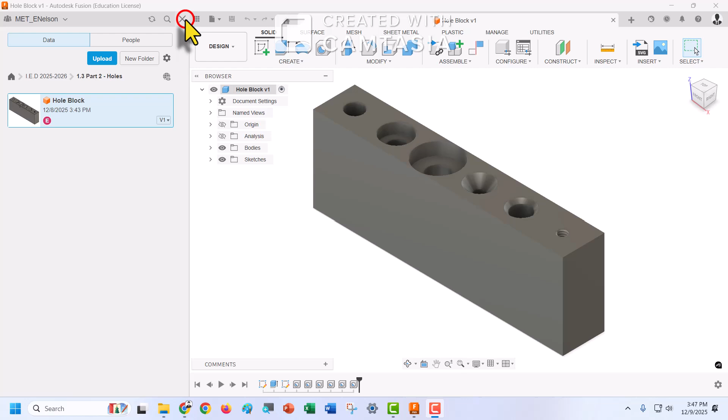And this is where it's most important because we're going to need to use the proper notation. Make sure you have the hole block open and you're in 1.3 part 2 holes. If not, make sure you have that folder and close this up. Begin like usual. Make a drawing from a design, and instead of from scratch, it should be from your title block, and press OK.

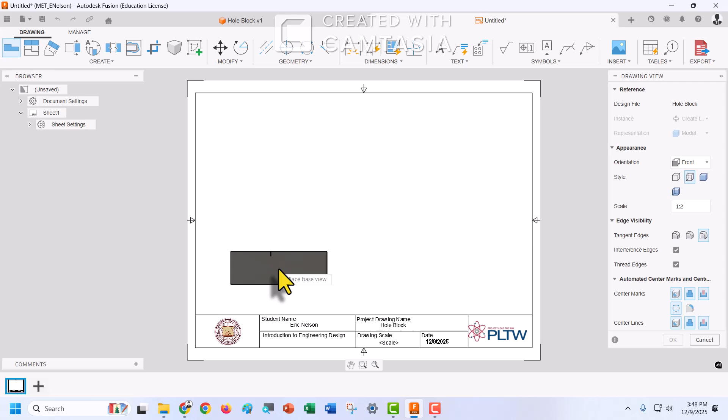Now, I think 1 to 4 is not going to be a good enough size, so I'm going to switch this to 1 to 2. And I'm going to place this, I want you to place it a little lower than you might normally do. And then we could hit OK.

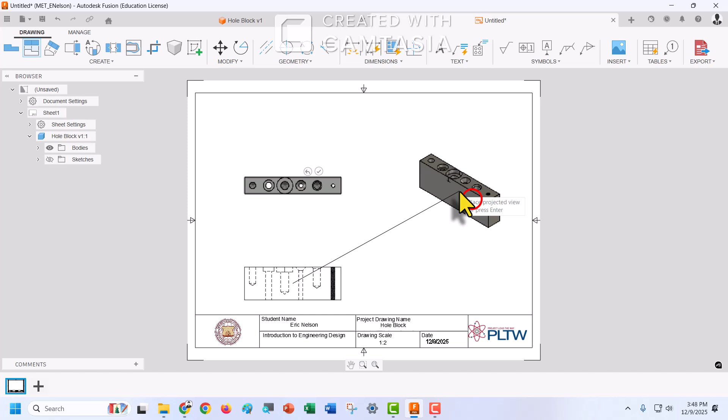And now we're going to hit project, and we're going to project to about this height, not too high, because we're actually going to put a lot of information above this. And go to the right and check it off. So the next step is we need to turn this into a shaded.

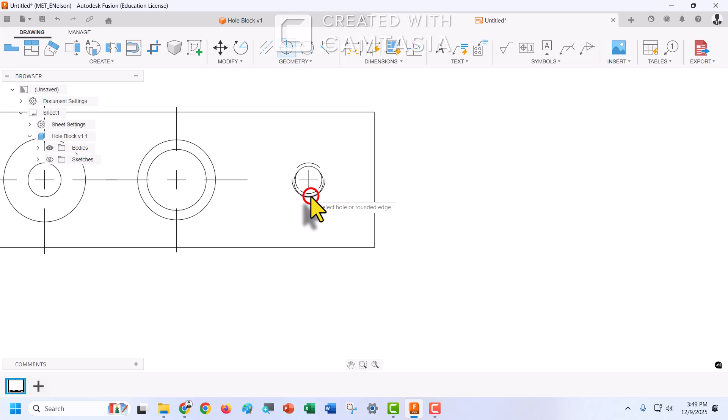Close. Now you may or may not have all of these icons, so make sure you get all of those. Also, these should all have center lines.

And that's it. Alright, so first thing I'm going to do is put the dimensions of the height. That would be this side right here, 2 inches. I'm going to kind of extend this a decent amount. That's 1 inch. And the point from any of these down, that's a 1/2 inch.

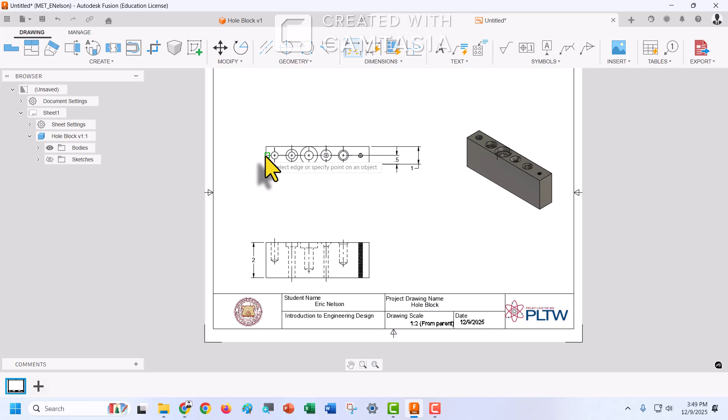Now what I'm going to do is just start from the left edge and go to the center of each point, and I'm just going to keep doing this all the way over. All the way over. Click. Left edge, center, left edge, center. We can see that these are each an inch farther than the last.

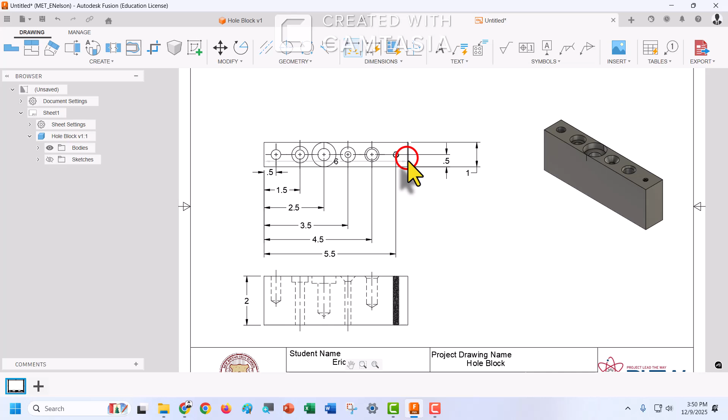And I don't have to do the last math because I know that this is, oh, I do have to, because I didn't say that it's 6 inches. And there we go. So that's the easy part. That's what we've talked about before. The more challenging part is going to be getting all the correct notation, right? We can get the diameter if it's just a regular circle, but these are very special holes. So Fusion makes it nice and easy for us.

Hit the drop down for text, hit hole and thread note. We're going to click on the edge, and because I'm going to bring this to the left, we're going to click on the left edge, and I'm going to just arbitrarily put it down because I'm probably going to have to fix this later. Then I'm going to do the same thing here. And the same thing here. Now I'm going to go the other way.

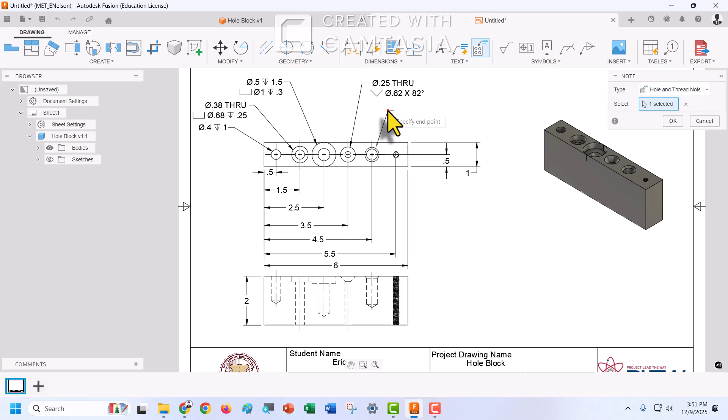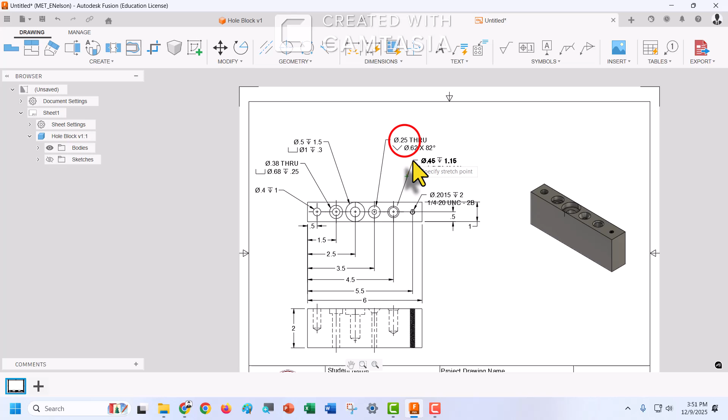Okay, now right click and press OK or press cancel. Now what you're going to notice is it's a little bit sloppy. So click on this once, we can kind of space these out a little bit. Again, if you click on it once, you get this gray dot. Make sure you don't cross any of the leader lines. Make sure there's enough space that everyone could follow.

Now, I'm actually going to make a change right here. So quarter is a 1/4 inch diameter. 20 is your threads. 2B is important, but this part, 0.2015 down 2 inches, that's not important, right? Because we know it's going to be a through hole, so I'm going to write the word through, but that's actually the diameter of the interior parts of the thread.

So we're going to click, make sure you get this top part, and erase everything. Then hit delete, not backspace, so it'll go up. Now bring your mouse all the way to the end and type in capital THRU, and then close. So now we know which type of threading it is, which way it's turning, interior or inside diameter, and then we have a through hole.

Now something that you will see in these is often with holes you want to have it round to the nearest hundredth. So, or not rounds, but what we're going to do is double click, and I'm going to make this 0.40 and 1.00. Now once I do that, I have to make these changes again to make sure that it looks nice. This is already in the hundredths.

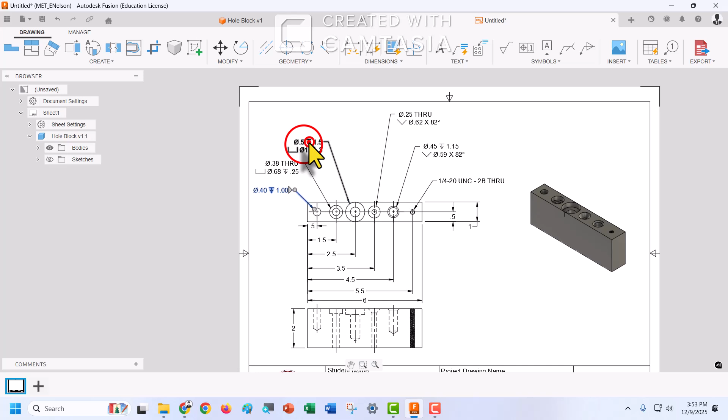These are not. So I'm going to make this 0.50, 1.50. The diameter is 1.00 with a depth of 0.30. Again, I can just move these around to make them look nicer. This is in hundredths, that's in the hundredths, and that's also perfect.

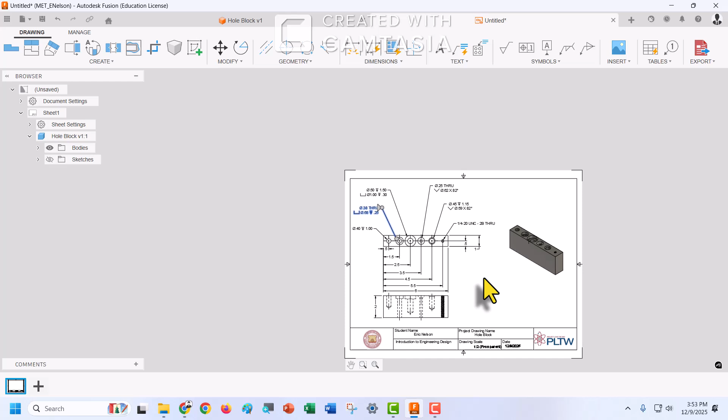So you're all done. Actually, what I might do too is I would drag these up a little bit. We don't need as much spacing, so we're not all done completely. Almost, though. And that'll give a little bit of space before you get to this distance. So that's all the information of this hole block. It's something that any engineer or manufacturer can see and understand pretty clearly.

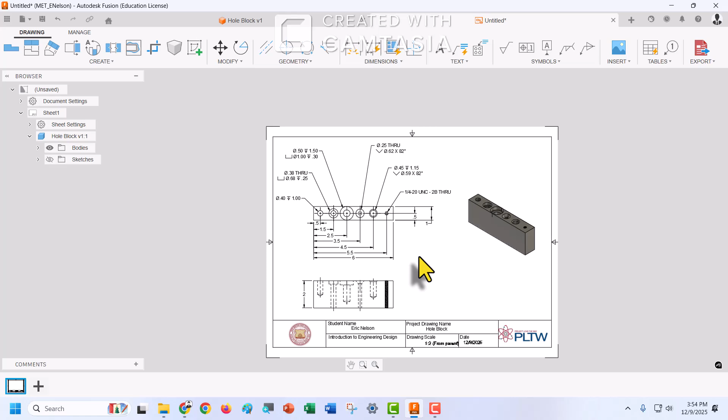So take a screenshot, Windows Shift S, and get everything. Make sure you save this hole block drawing, and in a few sections we're going to edit this drawing as well. Alright, you guys hopefully did a great job, and I hope you learned something today.